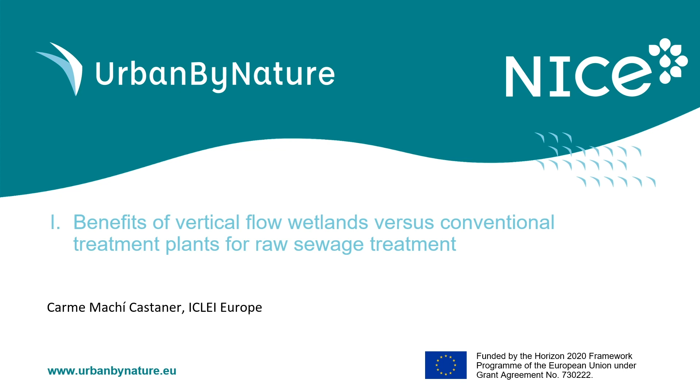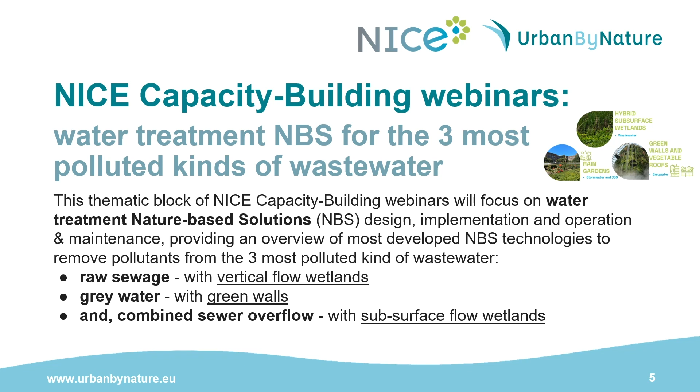My speech will concentrate on benefits of vertical flow wetlands versus conventional treatment plants for raw sewage treatment. This is part of a capacity building thematic unit that will focus on the design, implementation, operation and maintenance of nature-based solutions for water treatment. It will give us an overview of most developed NBS technologies to remove pollutants from the three most polluted kinds of wastewater, starting with raw sewage using vertical flow wetlands, followed by grey water, deploying green walls, and finally combined sewer overflow with subsurface flow wetlands.

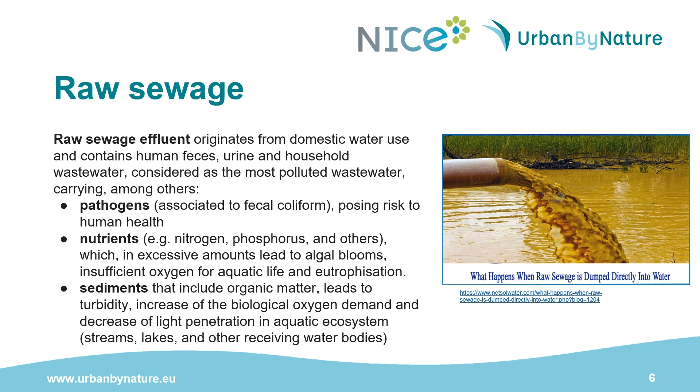As you might know, raw sewage originates from domestic water use, and it contains human feces, urine, and household wastewater, and it is considered the most polluted wastewater that carries pathogens, which are posing risk to human health, nutrients such as nitrogen, phosphorus, and others, which in excessive amounts lead to algal blooms, insufficient oxygen for aquatic life and eutrophication, and finally sediments that include organic matter, which lead to turbidity, increase the biological oxygen demand, and decrease the light penetration in the aquatic ecosystem.

The conventional approach to treat sewage, utilized by the most developed countries for the last 50 years and also expanded in developing countries, consists of speeding up natural treatment processes to remove water contaminants. These are the conventional wastewater treatment plants, and they are composed of a primary treatment which focuses on first settling and removing of solids, and an initial process of treatment of COD and BOD, followed by a secondary treatment in which aerobic biological processes, allowed by oxygen presence in aerobic microorganisms, help to remove remaining constituents. It is also possible to have a tertiary or an advanced treatment.

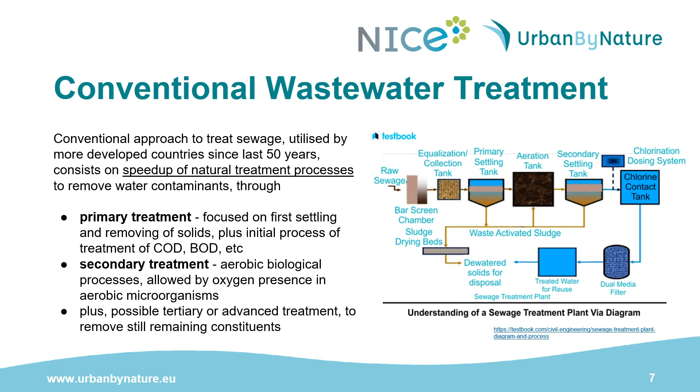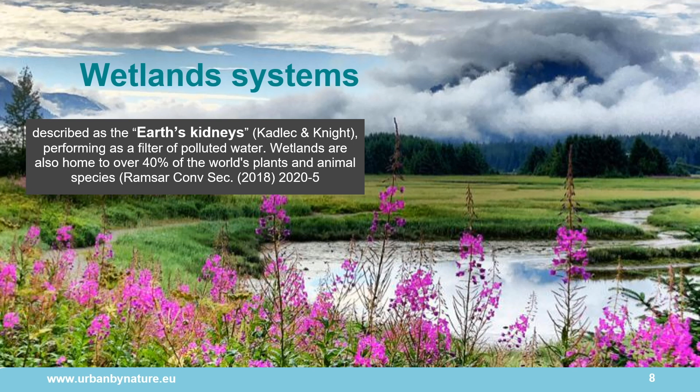However, as it has been researched, wetland systems are providing humanity multiple benefits, and especially they have a significant ecological importance due to the diversity of species and population densities they can support. Described as the Earth's kidneys by Kadlec and Knight, wetlands are also performing as a filter of polluted water. As main functions, wetlands can support aquifer recharge, flooding mitigation, sediments control, carbon sequestration, heat storage, and solar radiation absorption.

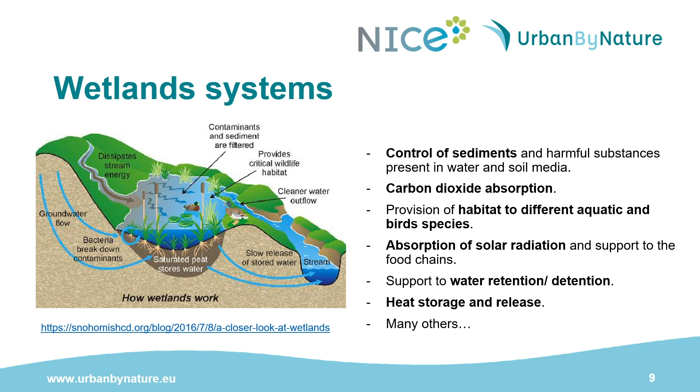Not long ago, humans defined a human-made engineered system, constructed wetlands, as the one taking advantage of and exploiting the natural potential of this natural ecosystem. Constructed wetlands can be classified as free water surface, horizontal subsurface, vertical flow, which will be the one we will focus on today, hybrid, which is the combination of the earlier, and a less researched one, floating systems. You can see here a scheme of a constructed wetland, which is based on a first and a second treatment stage.

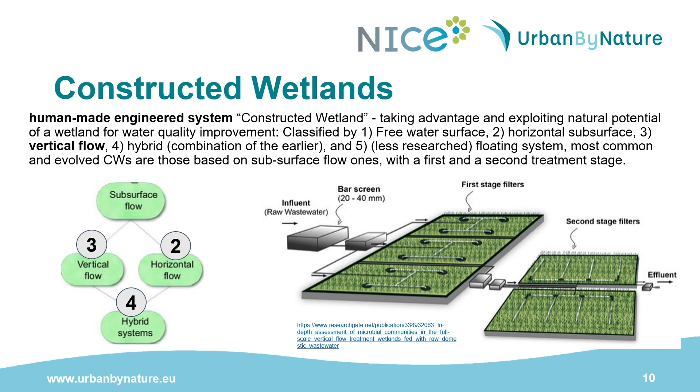Constructed wetlands have been evolving through time by incorporating sophisticated solutions such as aeration with varying oxygen frequency and flow to increase their performance, reversed flow circulation, additional layers, or even mixing horizontal flow with vertical flow, or a saturated with an unsaturated layer, which helps to improve denitrification processes.

Constructed wetlands support a high hydraulic and organic variation. This can be the result of tourism, fluctuation in household demand, a rainstorm event, or even the intrusion of clean water into the sewer system. They can be applied in different climates, even though the best performance has been noticed in tropical climates due to the higher temperatures.

Additionally, constructed wetlands do not require very costly and frequent sludge management as conventional treatment plants do. They only need to remove their sediments in 10 to 15 years, but it's very important that they have a good maintenance procedure to avoid problems in the future and reduce their lifespan.

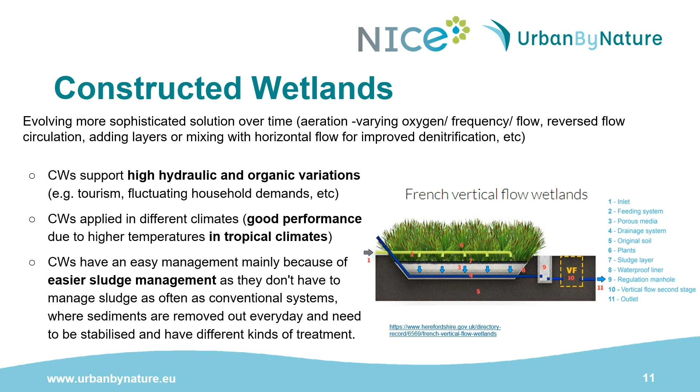As there are needs for space and reduction of costs, of course, research has been going through optimizing efficiency of the first treatment stage in order to achieve a more compact constructed wetland. Some improvements included the recirculation or the increase of performance by combination of unsaturated with saturated layers, which allows for nitrification and denitrification coupled processes.

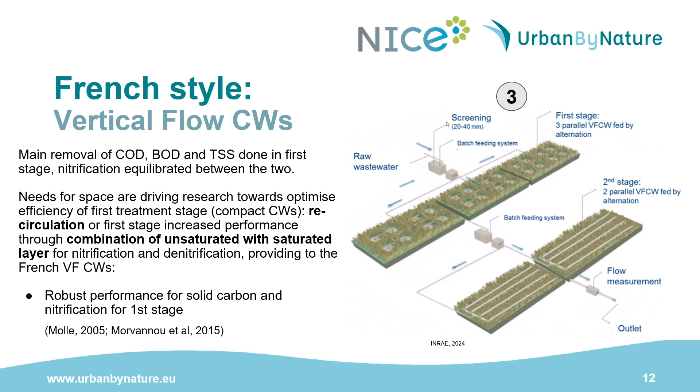All this has provided evidence that these systems have a robust performance for solids, carbon and nitrification for the first stage. More information can be found in the article that is cited below in this slide. The work that has been developed in this field combines all knowledge developed over the past 40 years in France. There are currently more than 5,000 constructed wetlands to treat raw wastewater in small communities in France.

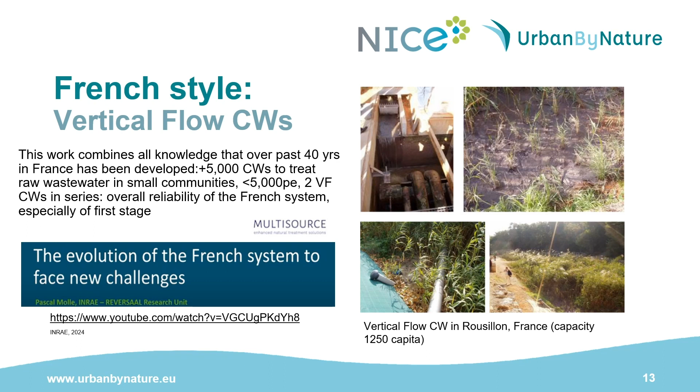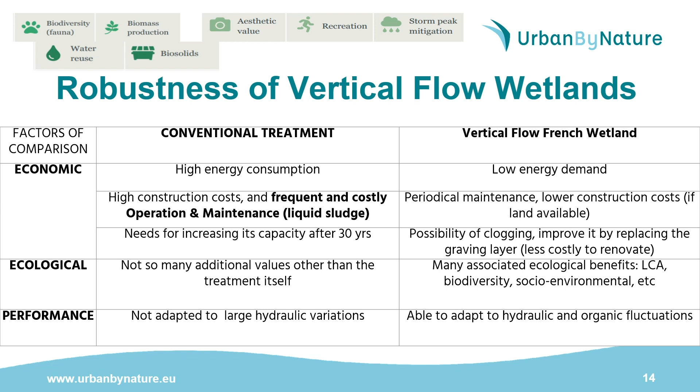In terms of ecological aspects, they do not offer many additional values other than the treatment itself, and they are not adapted to large hydraulic variations. However, we need to highlight that vertical flow French wetland systems normally require land availability, which can be one of the main constraints when we want to implement them.